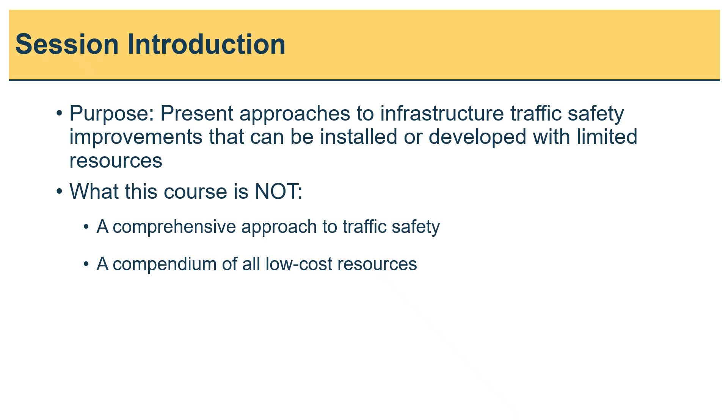Note that this training is geared towards actions that can be implemented with in-house staff and limited resources, and is not a comprehensive approach to traffic safety. The approaches presented here are a selection of low-cost countermeasures and best practices, though there are many other options agencies may consider as they work towards zero deaths.

This session will begin by defining what constitutes effective low-cost infrastructural approaches to traffic safety and explaining the purpose and benefits. Several examples of low-cost infrastructure countermeasures will be explored, including signage and pavement marking strategies, various speed management techniques, intersection visibility improvements, and different types of quick build and demonstration projects.

Low-cost countermeasures are countermeasures or implementation approaches that are designed to be affordable, scalable, and effective in addressing common roadway safety concerns without requiring major infrastructure changes. The intention of these strategies are to improve traffic safety by utilizing in-house staff, do not require engineering design, and utilize materials typically on hand for public works departments or can be obtained with minimal costs.

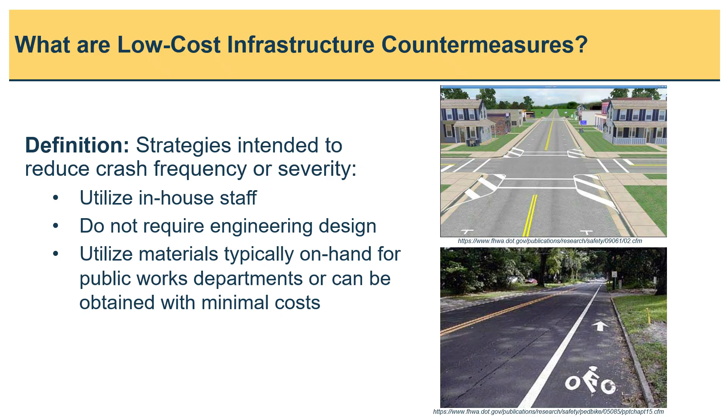Since maintenance departments typically have materials such as paint available, countermeasures such as applying pavement markings, like the curb extensions with crosswalks and the bike lane examples on this slide, are typically considered low cost and easily installed. In this first section, we will go into more depth on general pavement markings, with examples, location suggestions, and implementation guidelines.

Pavement markings are a versatile way to relay messages to all road users. Reflective or high visibility paint or tape is applied to the roadway surface to regulate traffic and to alert drivers of upcoming hazards or conditions, such as intersections, schools, pedestrian crossings, or horizontal curves.

Examples of pavement markings can include installing center or edge lines, or widening the edge lines from 4 inches to 6 inches where already present. Installing high visibility crosswalks is another pavement application that can be installed at any intersection where there is significant pedestrian traffic, which can be supplemented with advanced pavement warning messages or signage.

The location examples listed here are only a few suggestions on where to consider installing pavement markings to increase safety for all road users, including intersections, pedestrian crossings, bike facilities, school zones, curves, roundabouts, and highways.

In addition to these specific examples, determine if it is possible to apply the pavement markings systemically, meaning that they can be applied to a network of roads or intersections that meet certain criteria, not necessarily dependent on crash history or specific areas of concern. Another suggestion would be to identify opportunities to incorporate striping into other projects, like painting center or edge lines on a road that previously did not have them during a repaving cycle, or upgrading to a high visibility thermoplastic.

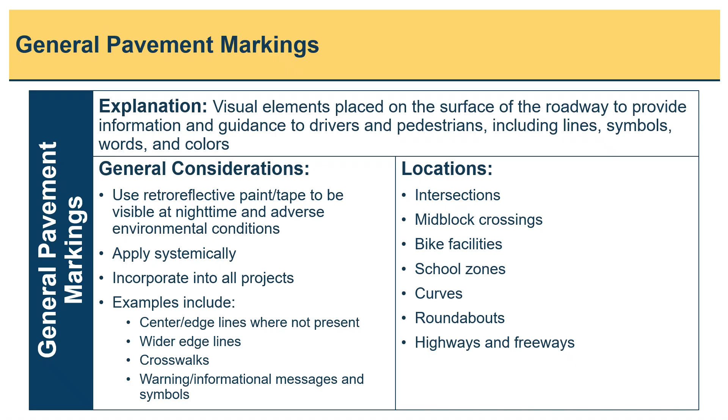Consult the Local Road Safety Plan and appendices for location recommendations specific to your county, including a systemic network of locations based on roadway attributes where certain pavement markings may be more effective.

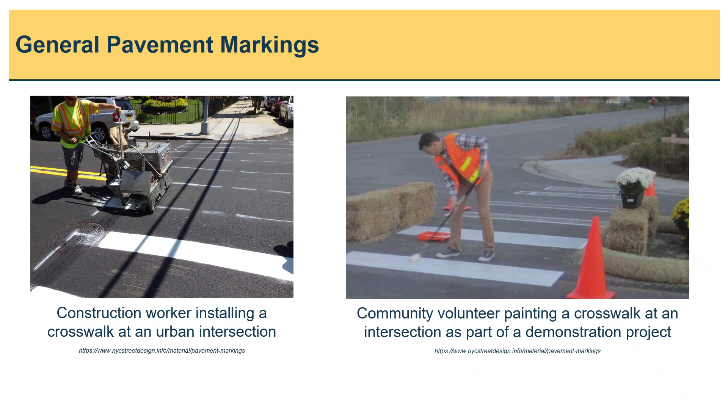Pavement markings shape how streets are used, whether applied by professionals or created through community collaboration with demonstration projects. Trained crews use specialized equipment for precise, durable installations, while volunteers can also apply temporary markings with paint or tape. Borrowing equipment and expertise from other agencies or counties can also help to keep the cost low.

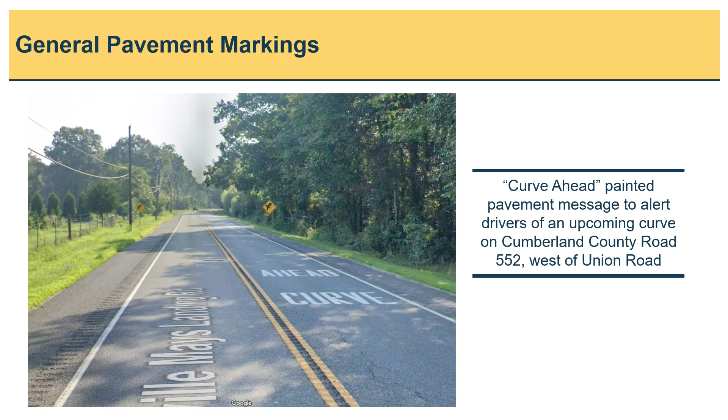An important part of general pavement markings are stencils. Borrowing stencils can make street improvements more accessible, allowing communities to create clear, consistent markings without needing expensive tools. It's a simple way to share resources, spark local engagement, and ensure traffic messages are easy to read and widely understood. The example shown here illustrates a curve ahead pavement message to alert drivers of an upcoming curve in the road on Cumberland County Road 552.

This next section will highlight some examples of low cost and easily implementable speed management strategies.

Installing optical speed bars, or speed reduction markings, is a speed management technique that encourages drivers to reduce their speed with the use of pavement markings. The markings are composed of a pattern of transverse dashes perpendicular to the lane lines, designed to create an illusion that a vehicle is accelerating by spacing the dashes closer together in the direction a vehicle is traveling.

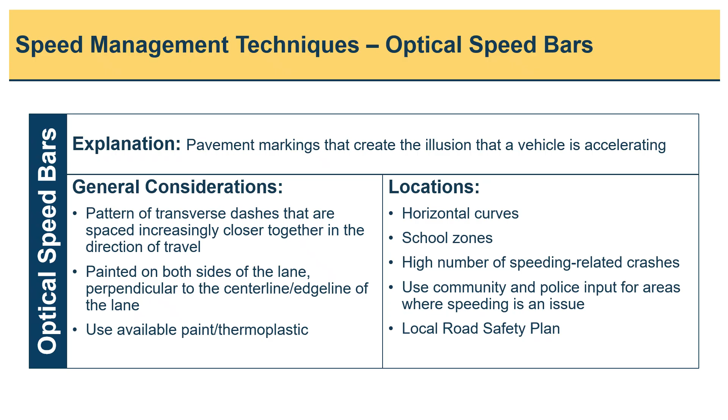Consider implementing optical speed bars in advance of horizontal curves, in school zones, locations that have a high number of speeding-related crashes, locations identified through a crash data query tool, or locations identified by the community or local law enforcement personnel where speeding is a concern. Also consult the local road safety plan and appendices for more guidance on places where speeding-related crashes may be an issue.

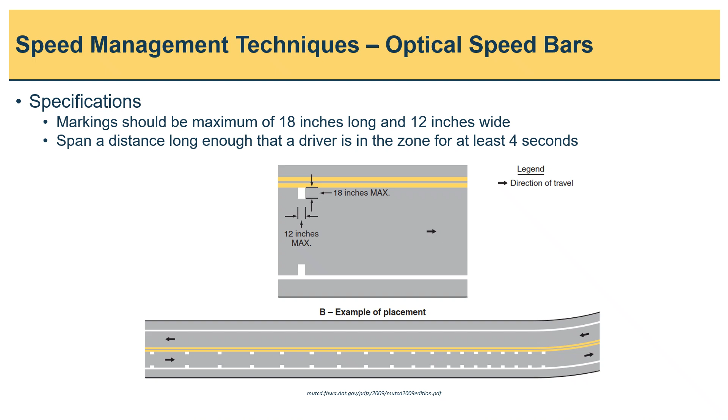Optical speed bars are painted on both sides of an individual lane, perpendicular to the center or edge lines. Markings should not exceed 18 inches long and 12 inches wide. The marking should span a total roadway distance long enough that a driver is in the optical speed bar zone for at least 4 seconds, as recommended by the Federal Highway Administration. The bottom image demonstrates the placement of optical speed bars ahead of a curve.

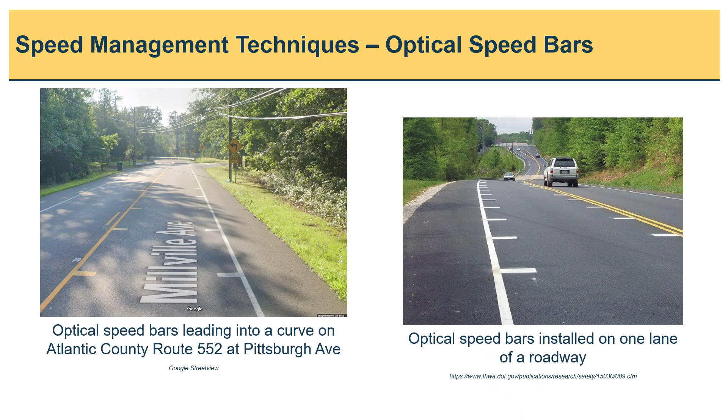Once the optical speed bars are installed, a plan to evaluate their performance should be developed, which may include an analysis of crashes before and after implementation, a comparison of the need for enforcement or citations issued, or the completion of a speed study. Progress updates should be noted quarterly on the local road safety plan website at saferoadsouthjersey.com.

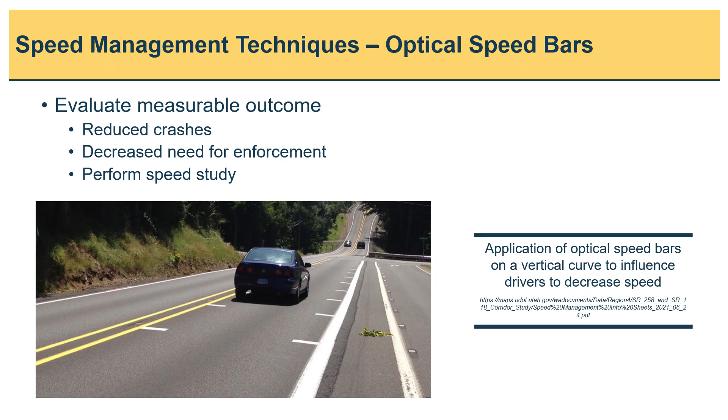Lane narrowing is another type of speed management technique. This countermeasure decreases the lane width of a roadway to influence drivers to slow down. Although a roadway lane typically measures 12 feet in New Jersey, the New Jersey Roadway Design Manual recommends decreasing the width to 10 or 11 feet for the purpose of traffic calming, though this will depend on your specific roadway conditions and environment.

Prioritize locations that have a high number of speeding-related crashes, identified using a crash query tool or local safety plans, or consult with the community or enforcement agencies for input on areas where speeding is an ongoing issue. Ensure that you're also considering roadway attributes when considering locations.

Narrowing lanes can have a detrimental impact on roads with high traffic volume or truck traffic. Consider the land use and whether the roadway is in an urban or rural area and the impact a narrower lane will have. Also take into account the pedestrian and bicycle traffic, as narrowing a lane can decrease speeding ahead of crosswalks but also create enough room on the side of the road to install a bike lane.

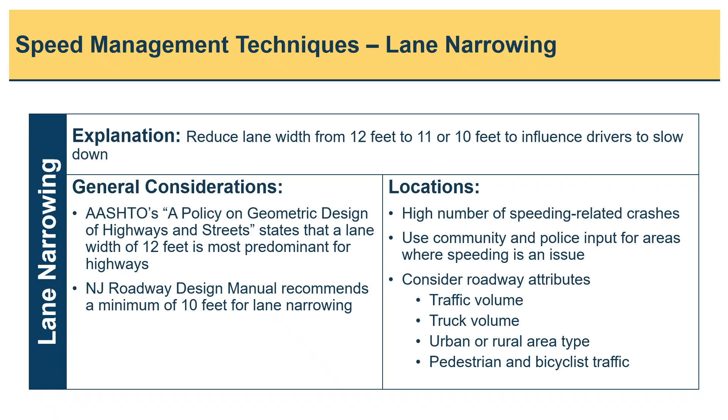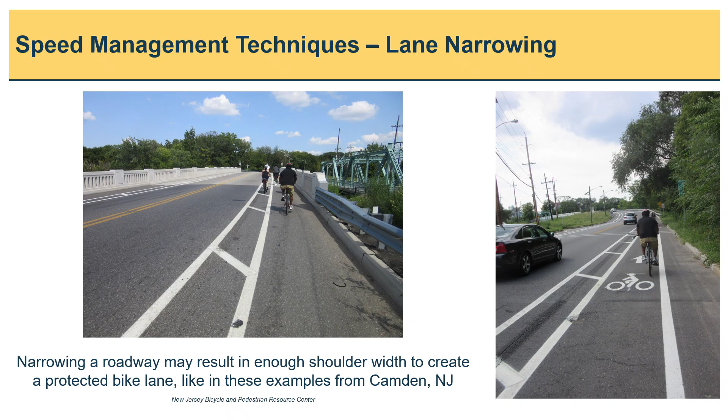One result of narrowing a lane or roadway is an increase in shoulder width. While the shoulders can be left as is to increase the clear zone, they can also be converted to a bike lane if the width and roadway characteristics meet the design standards and criteria, like this local example in Camden, New Jersey. Consult Complete Streets or the Roadway Design Manual for recommendations to help get you started.

When prioritizing locations that would make good candidates for lane narrowing, it is recommended to first consider locations that have a high number of speed-related crashes identified using a crash data query tool or be identified by the community or local law enforcement personnel where speeding is a concern. Also consider roadway attributes to narrow down the possible locations, such as area type, traffic volume, truck traffic, and pedestrian and bicyclist volume.

Before new edgelines can be painted, the existing ones must first be removed and the roadway resurfaced or microsurfaced as necessary. Once installed, a plan to evaluate the performance should be developed, which may include a measured reduction in crashes, a decreased need for enforcement, or the completion of a speed study.

Narrowing lanes may provide an option to add a separated bicycle lane or create wider or paved shoulders on one or both sides of the road. Another strategy is to supplement this with striping in the shoulder, shown in this example.

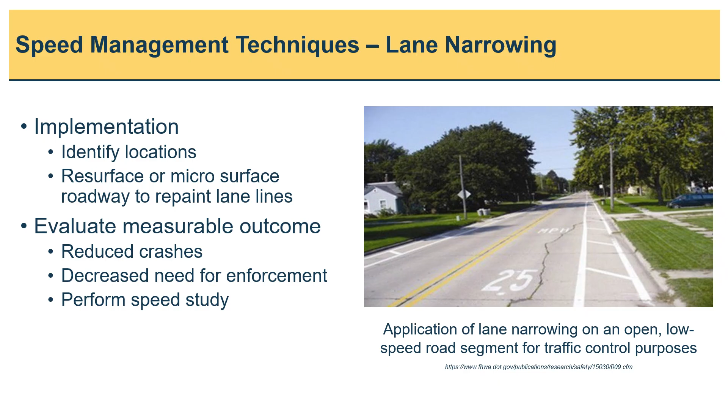Vehicle or dynamic speed feedback signs are electronic signs that alert drivers of their speed using radar. The speed is detected and then shown on an LED display. If a vehicle is exceeding the targeted speed, their speed will flash or display the text 'slow down' or other message to indicate speeding. Variations of this device can be portable or permanent, or solar powered so they do not require electricity or additional power hookup. This is especially beneficial in rural areas where a power source may not be available.

Choose locations to display speed feedback signs based on where speeding is a concern or has the potential to be an issue.

This may include locations with a high number of speeding-related crashes, identified using a crash data query tool or pre-existing transportation plans, locations identified by the community or local law enforcement personnel where speeding occurs, in advance of horizontal curves, school zones, work zones, or in residential neighborhoods.

If using a portable version, consider relocating the sign frequently to different locations to maintain the novelty of the device.

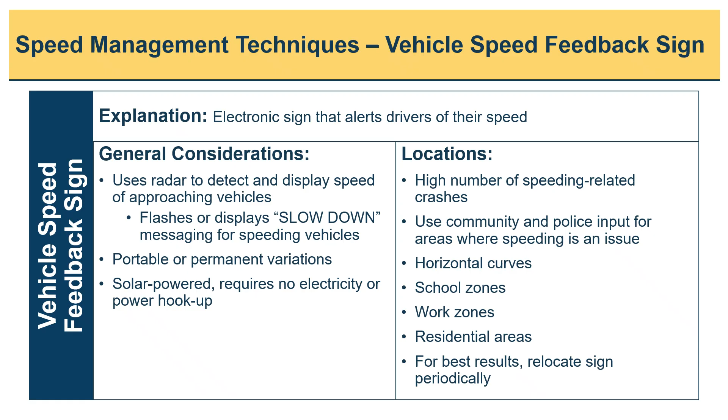While there are many different models of a vehicle speed feedback sign, the overall idea is to alert the driver of their speed compared to the posted speed limit and encourage the driver to slow down.

Different options for the feedback sign can be a flashing speed if they are over the speed limit, or a customized message. Portable speed feedback trailers, like in these examples, are a great option since they can frequently be relocated to different areas of concern.

When setting up a portable speed feedback trailer, ensure that the device is not placed in the potential path of pedestrians, bicyclists, or emergency vehicles. One good option would be placing it in the grass or open area so it is not in the roadway or blocking the shoulder.

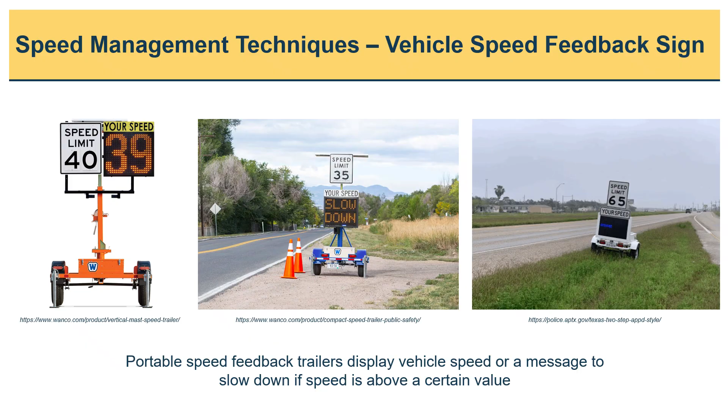It is worth noting that some models of speed feedback signs have the capability to collect and store speed and traffic volume data, which can then be downloaded and utilized for alternate traffic analysis, enforcement planning, or infrastructure improvement strategies.

Once installed, a plan to evaluate the performance should be developed at each separate location that a speed feedback sign is posted, to determine its efficacy or need for other speed mitigation strategies. This can be measured by reviewing any crashes that occurred while the feedback sign was posted, comparing traffic stops or citations, or the completion of a speed study.

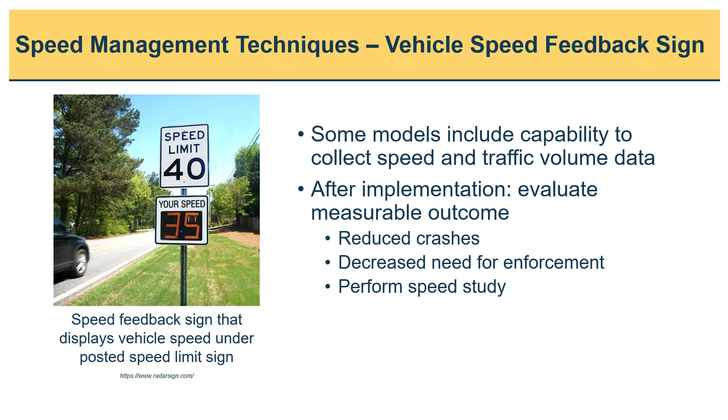The next countermeasure we'll discuss is daylighting intersections.

Daylighting intersections is a general term that includes any method of improving sight distance at an intersection approach. This includes removing visual obstructions or improving the visual field of view, which also promotes pedestrian and bicyclist safety.

Taking land use into account when selecting locations, such as whether an intersection is in a rural or urban setting, can help prioritize sites that will benefit most from daylighting.

Clearing vegetation, overgrowth, and other obstacles is especially impactful at rural intersections where speeds may be higher and drivers have less time to react for vehicles turning from a side road. We strongly recommend implementing this systemically along any high-volume rural roadway.

Alternatively, daylighting at urban intersections may focus more on pedestrian safety, such as adding in curb extensions or prohibiting parking near the intersection by using materials such as poles, pavement markings, or planters.

This can also be implemented systemically along urban corridors to adopt a proactive approach to safety, to supplement application at intersections where crashes have already occurred.

Intersections that are a good candidate for daylighting can be identified by executing a crash data query with a program such as Numetric, by identifying urban intersections with pedestrian or bicycle traffic, or by consulting community representatives.

There are also resources through SJTPO's safety planning website with links to lists of intersections that have already been analyzed as part of a network screening analysis, including a list that represents pedestrian and bicycle crashes at intersections for each county. The county local road safety plan also contains a systemic analysis to aid in implementing across a broader network.

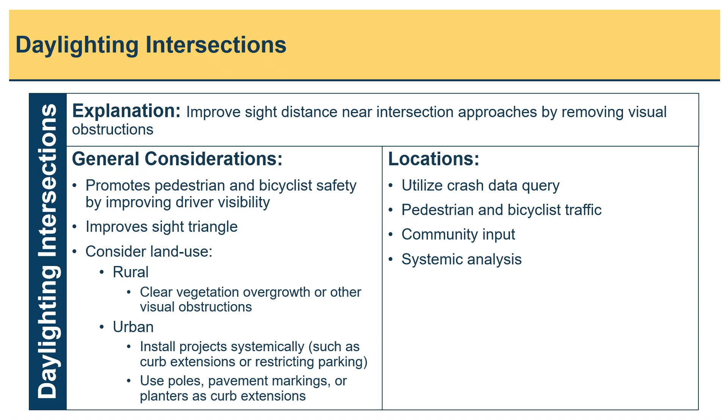The concept behind intersection daylighting is opening up the visibility or sight triangles approaching the intersection. In an urban environment, this can include prohibiting parking and installing curb bump outs to decrease blind spots and increase visibility, especially of pedestrians crossing the road.

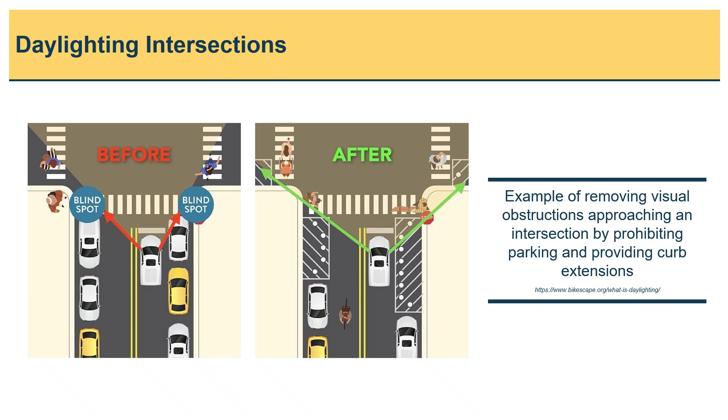In a rural area, clearing vegetation and other obstacles opens up the intersection approaches, making it easier for drivers to slow down for vehicles that enter from an intersection onto the major road. Intersections adjacent to curves should also be identified as priority locations, as visibility can be exceptionally poor.

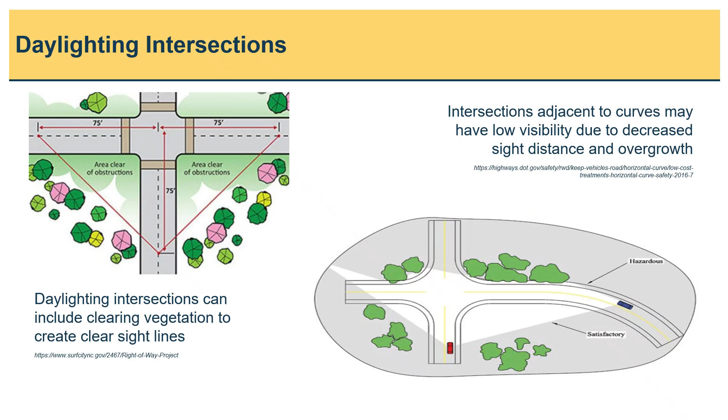To select a strategy to implement, consider the resources and budget. Many of the ways to implement daylighting at intersections can be low cost and use materials that are already in-house, can be borrowed, or be purchased at a low price.

Partner with local businesses, stakeholders, engineers, and planners to determine feasibility. In urban areas where several locations are in close proximity to each other, consider installing systemically to maximize resources.

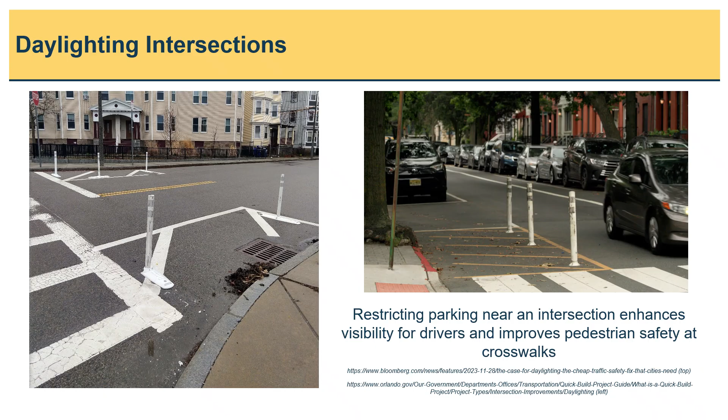Once installed and results are evaluated, consider alternate methods to improve the outcome, or consider a more permanent or upgraded fixture if the project is successful.

In the final section of this training, we will focus on quick build and demonstration projects with examples, implementation strategies, best practices, and location suggestions.

Quick build and demonstration projects are small-scale, non-permanent fixtures or strategies that can be implemented in a much shorter time frame than full build improvements. Because of the materials and construction techniques used, these projects can be a bridge to a permanent project or be used to pilot a project before broader implementation.

Since these projects are intended to be short-term, temporary, and reversible, this provides the opportunity to see potential results and receive community feedback before a more permanent solution is installed, keeping the initial project relatively low cost. Projects can be varying degrees of level of effort, depending on the resources and funds available.

Quick build and demonstration projects are also a key element in advancing the Complete Streets initiative, which incorporates safety of all road users and modes of transportation in designing a roadway.

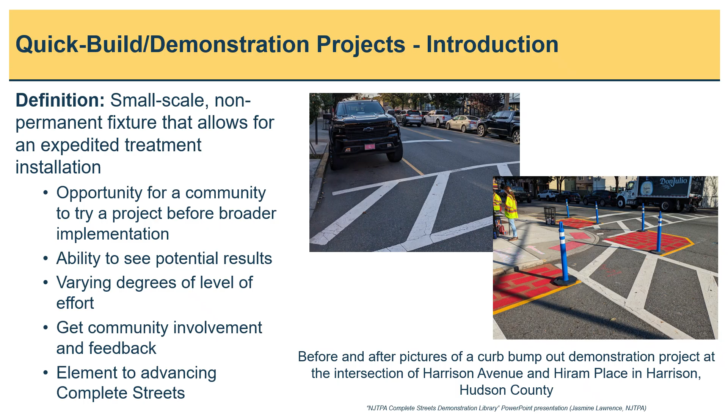There is a technical assistance program available to provide support for municipalities in the SJTPO region, which we will detail later in this presentation. There are several quick build and demonstration projects that have already been implemented in New Jersey, including this curb bump out at the Harrison Avenue and Hiram Place intersection in the town of Harrison in Hudson County. This slide shows a short list of common examples of quick build or demonstration projects.

These can include constructing a protected bicycle lane using paint, delineators, or barriers. In areas with high pedestrian activity, different variations of curb extensions can be installed to prohibit parking, improve intersection visibility, and to shorten the crossing distance for pedestrians.

These can be accompanied by the addition of crosswalks or mid-block crossings, or improving the visibility of existing crosswalks, providing the opportunity to enlist local artists and community input.

A quick word of caution when installing asphalt art for installations of curb extensions and crosswalks: make sure that it does not interact with or adversely impact official traffic control devices, such as other striping, or is distracting or confusing for road users.

A pedestrian refuge island can be incorporated into crosswalks to also decrease the number of lanes a pedestrian has to cross. Prohibiting or changing parking, whether it's moving a parking zone or prohibiting it near curb extensions, can be a good way to see how the community reacts while influencing safety.

Roundabouts are a good candidate for a quick build project to also gauge public interest and feedback at high-risk intersections and to measure the potential success of a permanent one. Many of these techniques can also be used as a form of traffic calming where speeding is an issue.

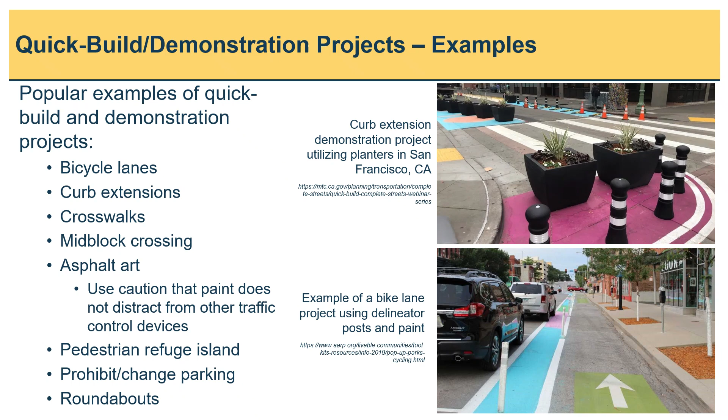One of the benefits of these types of projects is that the materials are typically low cost or already supplied in-house. Some materials, such as pavement stencils, can be borrowed from neighboring cities or counties, while others may be donated, especially if enlisting the help of local artists or businesses that may be able to provide their own paint or planters.

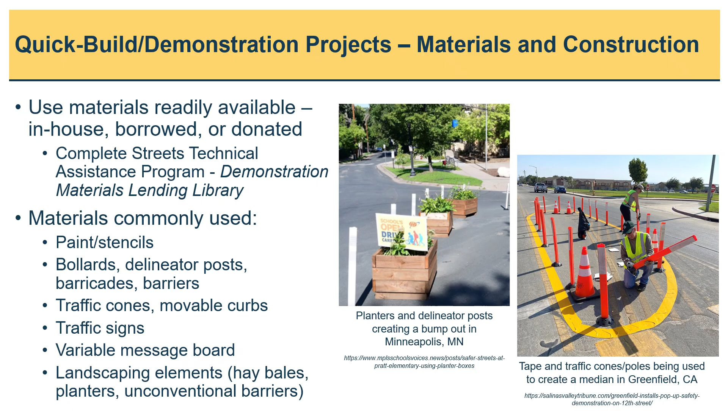The Complete Streets Technical Assistance Program is creating a lending library of materials available to municipalities of SJTPO through their application process. Commonly used materials include paint and stencils, bollards, delineator posts, barricades and barriers, traffic cones, movable curbs, traffic signs, and elements of landscape design such as hay bales, planters, or other types of unconventional barriers.

All of these materials used in these projects are low cost or available through a lending library and are important elements in maximizing the effectiveness of this project. They allow for quick installation and easy adjustments, making them ideal for evaluating the effectiveness of design interventions in real-world conditions.

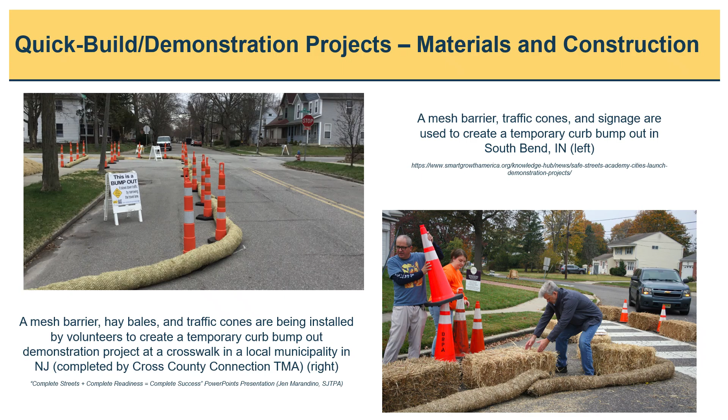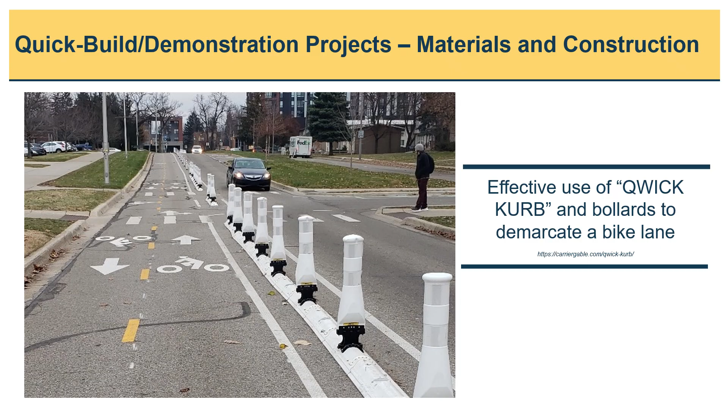Bicycle lanes can be installed on the side of the road by limiting street parking, narrowing lanes, or using the shoulder. Bike lanes must be separated and protected from adjacent vehicles, which can be achieved by adding materials that provide both a physical barrier and vertical element.

Commonly used materials include a combination of paint or tape, bollards or delineator posts, traffic cones, planters, or any other fixture that defines the separation of lanes.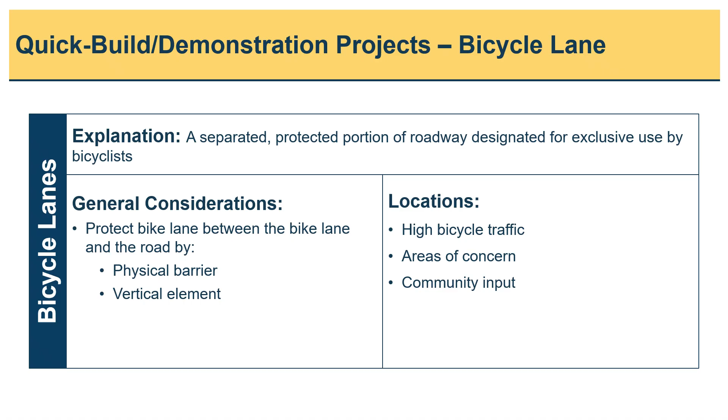Identify locations where a bike lane would be most useful, where there is high bicycle traffic, related crashes, or consult the public on where they would ride a bike if there were proper infrastructure. This can be done using a survey, social media, or by talking to local residents or businesses.

Along corridors with high bicycle traffic, protected bike lanes can be delineated using physical barriers such as planters and bollards to separate cyclists from vehicle traffic. These treatments enhance rider safety, improve visibility, and encourage multimodal transportation.

Informational signage and QR codes may be deployed to educate the public and gather feedback during demonstration projects.

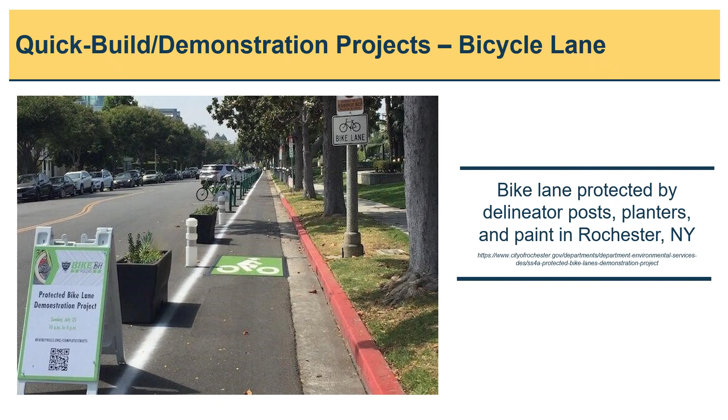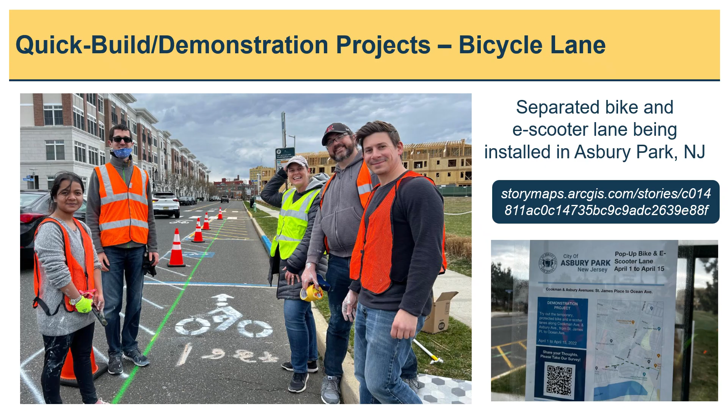Mid-block crossings are crosswalks that provide a dedicated space for pedestrians to cross a road where there are no intersections or on a stretch of road that does not have close adjacent intersections.

When installing a mid-block crossing, supplement the crosswalk with appropriate signage and pavement markings. Also consider constructing curb extensions or bump outs to improve driver visibility of pedestrians and as a form of traffic calming. There are several ways to narrow down potential mid-block crossing locations.

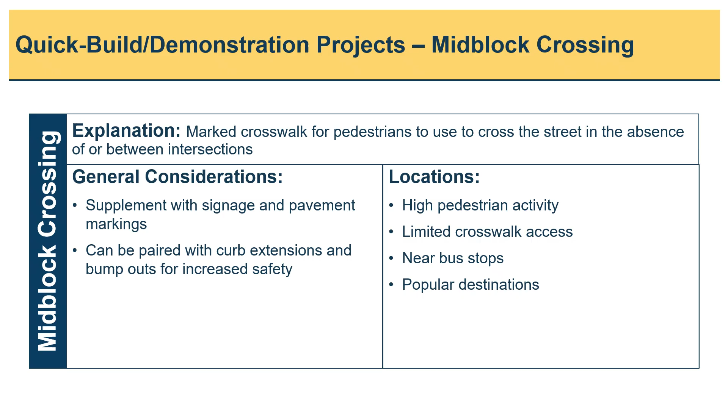Look for areas that have high pedestrian activity already present, no convenient crosswalks or places where pedestrians naturally cross the road without a crossing, and near popular destinations or bus stops.

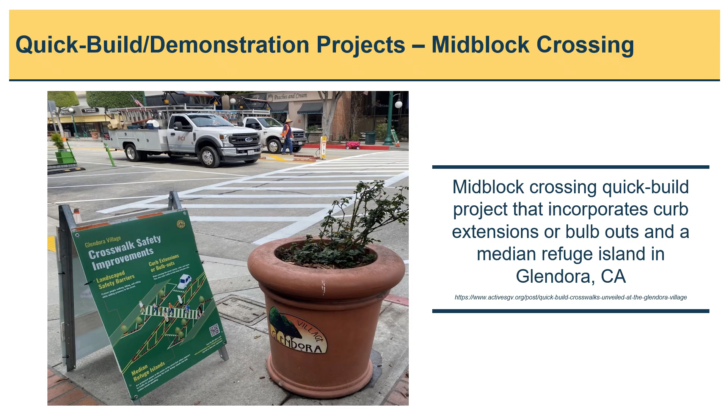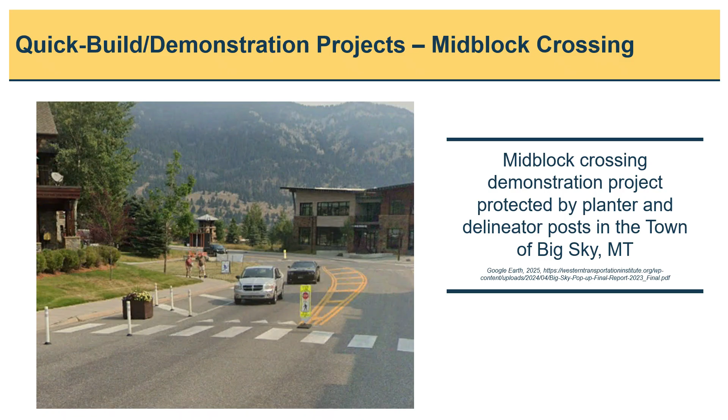This mid-block crossing was installed in the town of Big Sky in Montana as a traffic calming measure to visually signal drivers to slow down and be alert to pedestrian activity. Curb extensions were also installed for an extra layer of safety, as well as plastic bollards and a planter to improve driver visibility of pedestrians.

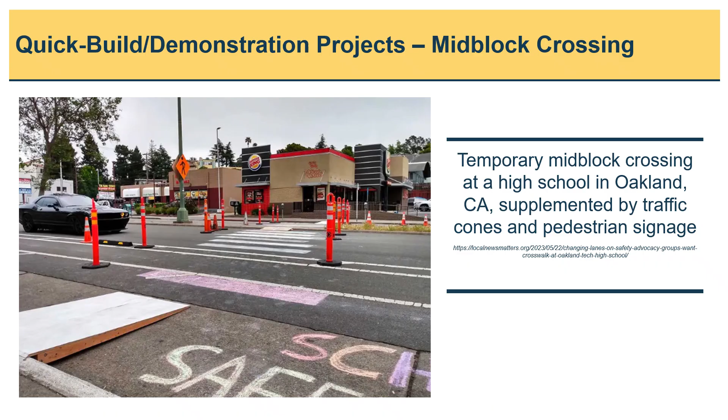Pedestrian refuge islands often complement mid-block crossings to improve safety and accessibility for vulnerable road users. A refuge island is a break in the median that gives pedestrians a safe area after they cross one direction of traffic while they wait for a break in traffic from the other direction before continuing to cross the remainder of the crosswalk.

This decreases the number of lanes a pedestrian must cross at one time and allows them to focus on only one direction of travel at a time. The recommended width of the refuge island is 4 to 8 feet to accommodate all users, such as groups of pedestrians, wheelchairs, strollers, and bicycles. When developing, ensure that there is adequate barriers and reflective markers.

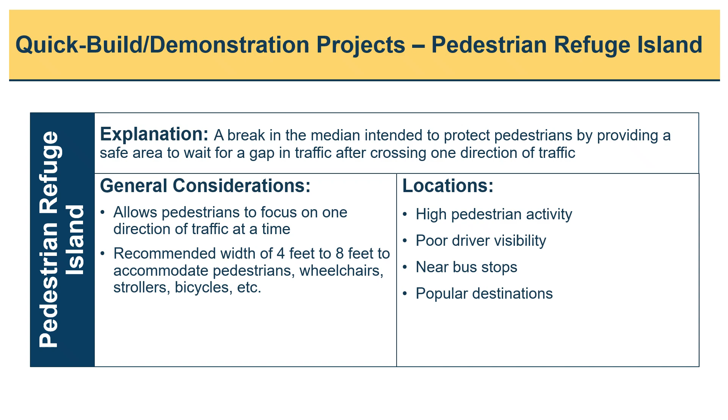This project in Madison, Minnesota features a mid-block crossing with the addition of a pedestrian refuge island protected by yellow and black bollards. This refuge island allows pedestrians to cross in 2 stages, focusing on one direction of traffic at a time, which is especially beneficial on wider or busier roads.

The combination of high visibility markings and physical barriers create a break for pedestrians and reinforces driver awareness.

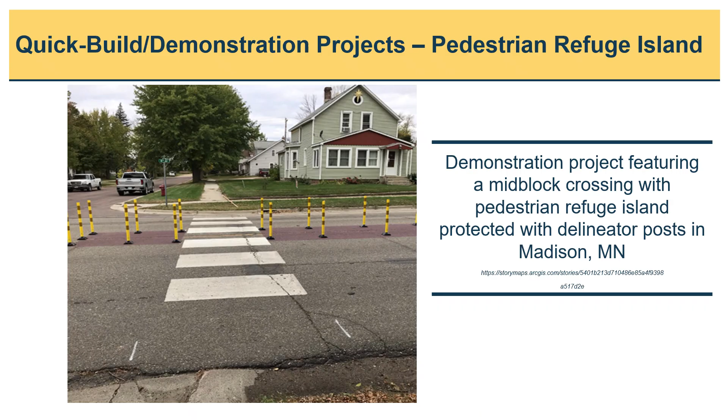This residential crosswalk in Seattle, Washington used a brick overlay with yellow bollards to designate the median refuge island.

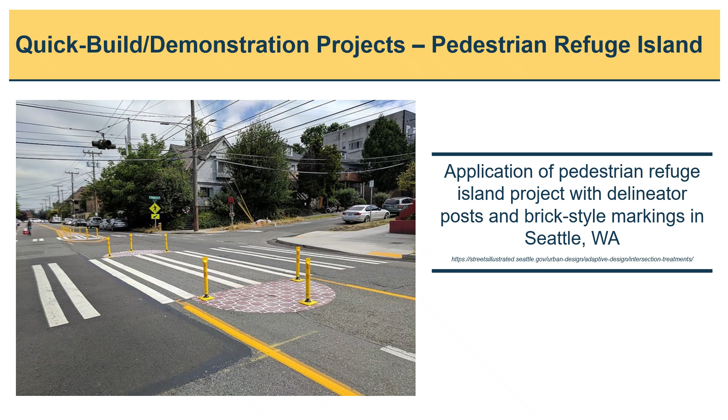A quick-build project in Omaha, Nebraska received funding to install temporary modular pedestrian refuge islands with the intention for them to eventually become permanent infrastructure. These mats are made up of interlocking pieces of rubber composite that can be put together in different configurations. Note the presence of different types of signage used, including pedestrian crossing indicators, directional arrows, and an informational poster.

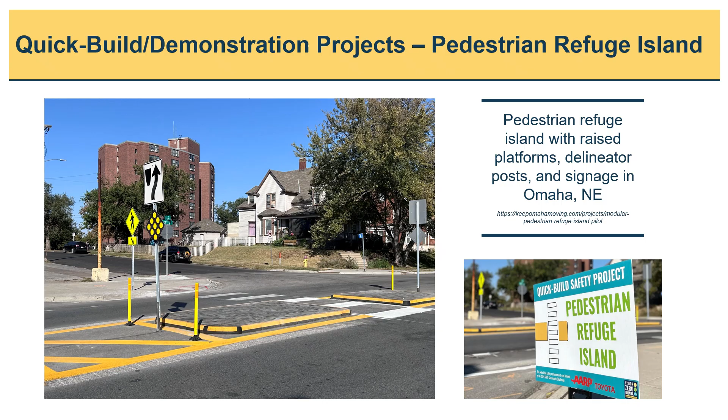Extending the curb line is another example of a quick build or demonstration project. This entails physically narrowing a roadway by expanding the curb line to help reduce pedestrian crossing distance, improve pedestrian visibility, improve intersection visibility, reduce vehicle speeds, and reduce corner radii at intersections to reduce turning speeds. Curb extensions are ideal at locations with high pedestrian traffic or where traffic calming is needed. There are three main approaches to curb extensions, including mid-block curb extensions, bump outs or bulb outs at intersections, and radius reduction at intersections.

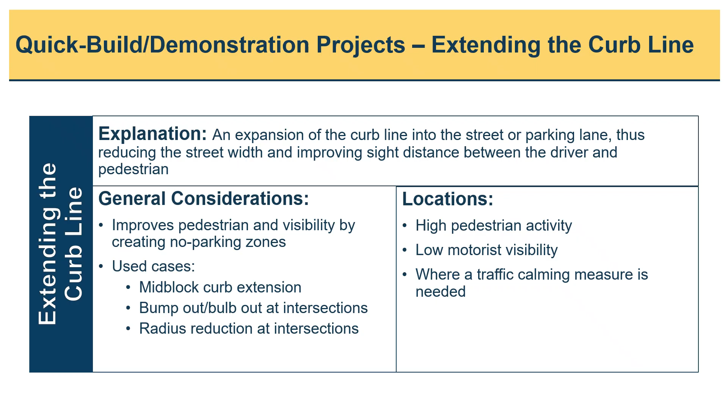This intersection in Tucson, Arizona features painted curb extensions with physical barriers, planters and bollards, that extend the curb line, creating corner bulb outs that reduce turning speeds, restrict parking at the intersection approaches, and shorten pedestrian crossing distances. These combined elements offer a cost-effective way to calm traffic and improve visibility at urban intersections.

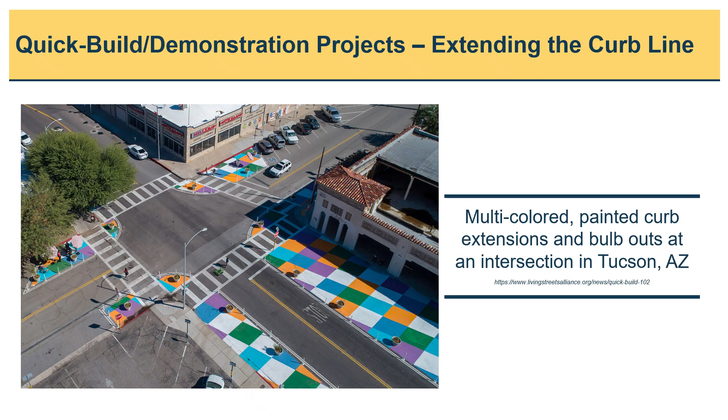While this intersection uses a unique painted mural to create curb extensions, use caution when painting the pavement to ensure it is not distracting to drivers or impacting other traffic control devices or pavement markings. This is an example of a painted bulb out that has white delineator posts and vibrant surface markings, creating a highly visible and protected pedestrian zone at an intersection corner.

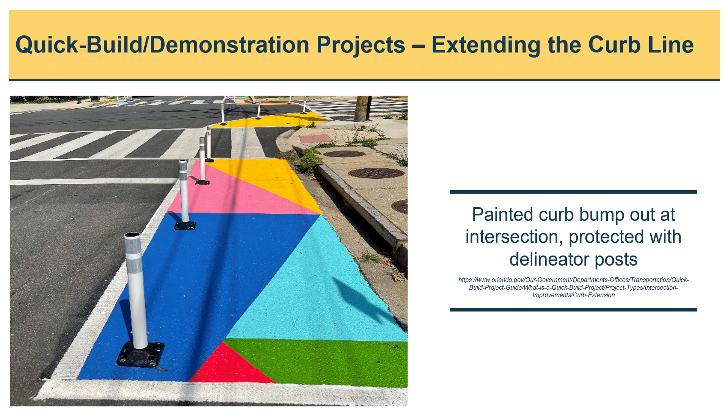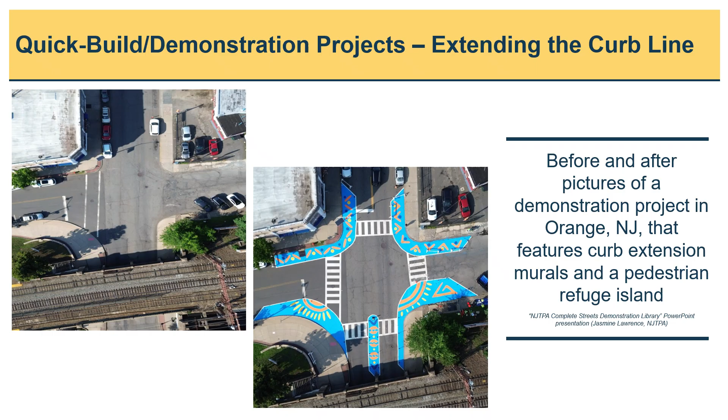Mid-block curb extensions are installed with mid-block crossings. Similar to bump outs or bulb outs, these curb extensions jut out into the road at crosswalks to shorten the crossing distance for pedestrians. Similarly, they also improve driver visibility when approaching a mid-block crossing.

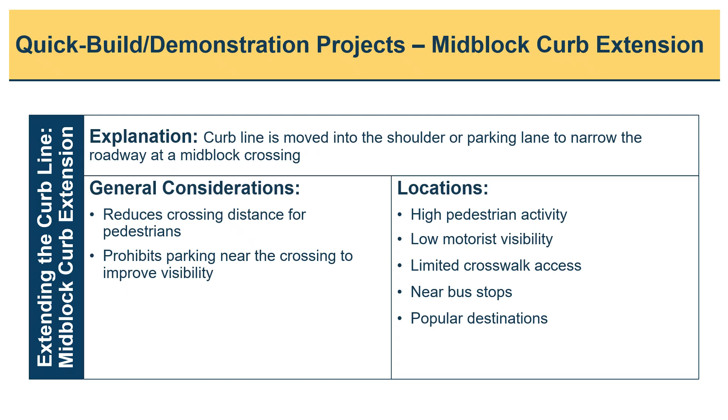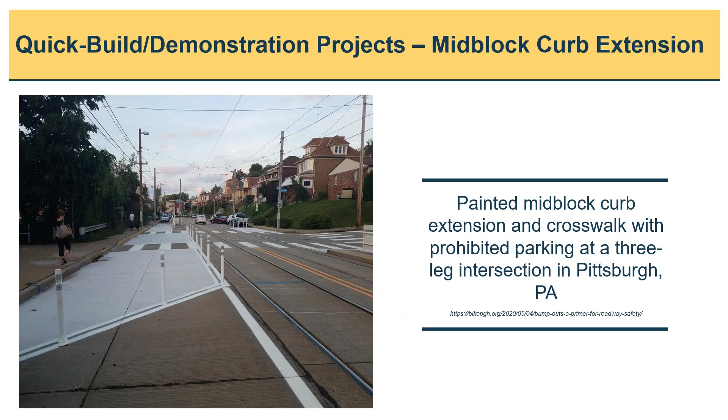This mid-block curb extension in Pittsburgh, Pennsylvania, allows pedestrians to safely cross from one side of the road to the other at the crosswalks. Although the crosswalks are at a three-leg intersection, they are still considered mid-block crossings since the major leg is uncontrolled. This particular crossing was positioned near a trolley stop and has future designs for a permanent installation. Note that the street parking in the area of the mid-block curb extension is now prohibited.

Mid-block curb extensions painted with bold patterns and vivid colors capture a driver's attention and draw their eyes to pedestrians that may be crossing.

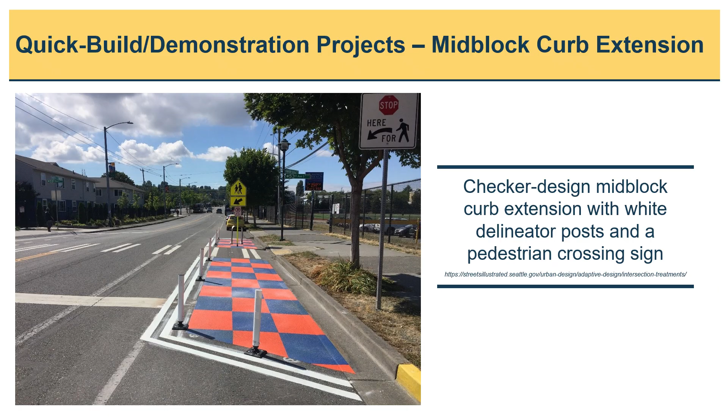In this local example, a mid-block curb extension was painted along Route 49 in Salem City in Salem County. Although this crossing is at a three-leg intersection, the main leg has no traffic control. Note that the curb extension prohibits parking leading up to the mid-block crosswalk to make it easier for vehicles to see pedestrians since they will not be obstructed by parked vehicles.

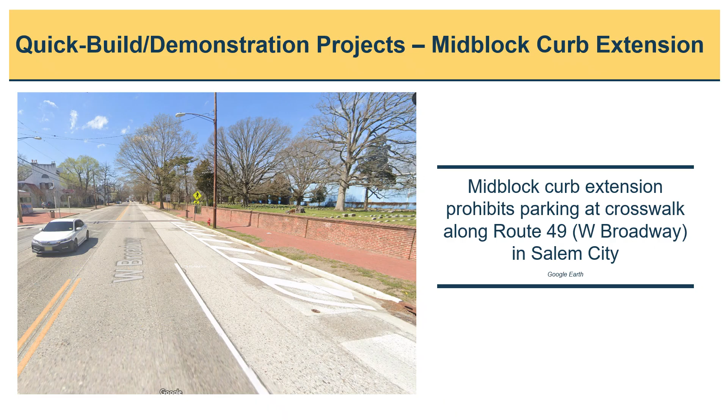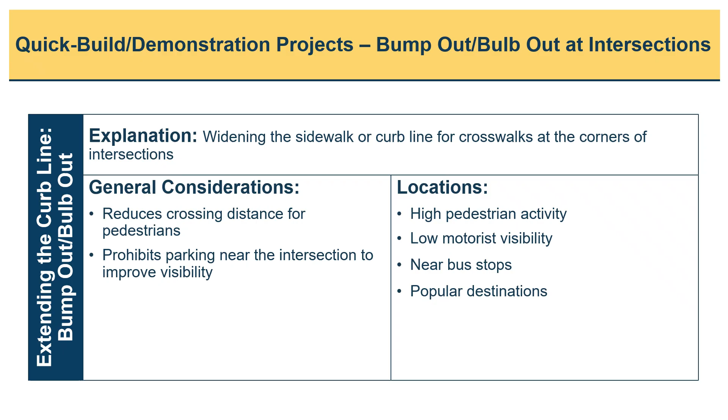At intersections with high pedestrian activity, bump outs or bulb outs are an effective strategy to prohibit parking, improve intersection visibility, and to shorten the pedestrian crossing distance. These extensions may be limited to one approach to an intersection or continue through the curb radius to the cross street approach as well. Consider locations with high pedestrian activity, low motorist visibility, and locations that are near transit stops or popular destinations.

This curb bump out in Chicago, Illinois features vibrant colors to grab the attention of drivers and to reiterate that this area is not for vehicular traffic or parking. The pole delineators act as a physical vertical separation between the vehicles and pedestrians that are standing in the bump out area.

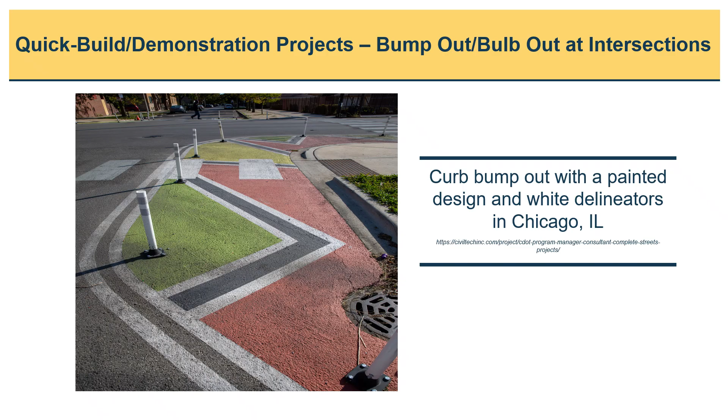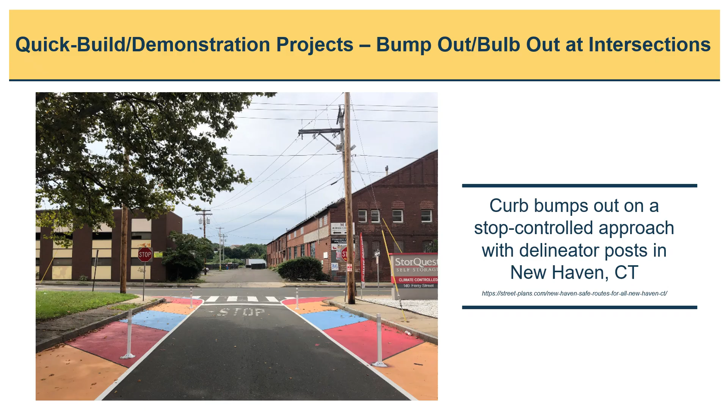Similar to the bump outs in Chicago, this urban intersection in New Haven, Connecticut also uses bright colors to draw the attention of drivers to pedestrians and to visually narrow the roadway. White bollards reinforce the physical separation between vehicles and pedestrian space, while dual stop signs and pavement markings emphasize driver awareness and compliance at the crossing.

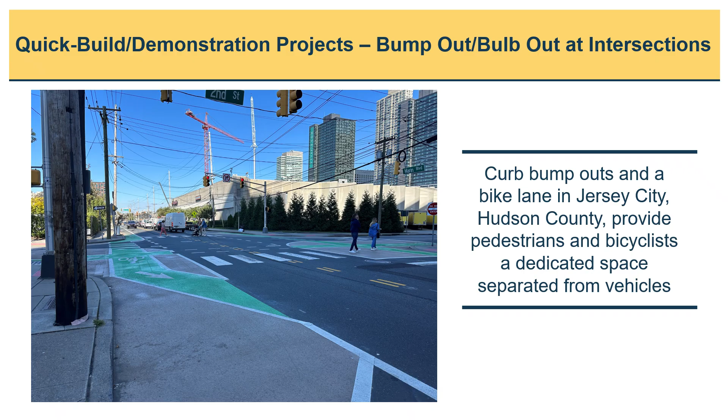This picture taken in Jersey City displays both a curb bump out and a bike lane, providing both pedestrians and bicyclists a dedicated area that's separated from vehicular traffic. These projects were created using pavement paint, which is a low-cost way to make a significant impact.

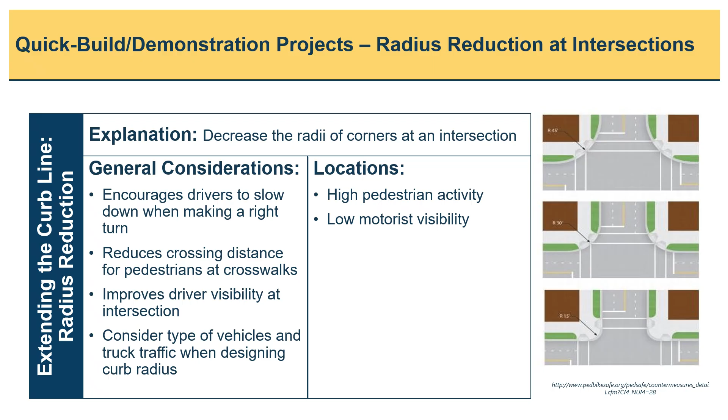Decreasing the radius at the corners of intersections is a design approach that increases visibility and encourages traffic calming. It encourages drivers to slow down when making a right turn and improves safety for pedestrians by reducing the crossing distance and opening up sight triangles approaching the intersection. Consider locations with high pedestrian activity and low driver visibility. Ensure that the type of vehicle and truck traffic is also considered when redesigning the curb radius.

Roundabouts may seem like an unlikely candidate for a quick build project, but can actually help gauge public feedback and measure potential success of a permanent roundabout. Temporary roundabouts should be considered at low-volume, unsignalized intersections that have a history of traffic congestion or high-severity crashes.

A roundabout consists of a central island, where entering traffic slows down and yields to vehicles already inside. This eliminates the left turn movement. Because the traffic control is changing, signage and delineation of the roundabout should clearly communicate the change to approaching drivers, as well as how drivers should navigate the intersection. Supplemental signing and pavement markings should be considered. Also consider the type of vehicles using the intersection to ensure that truck traffic will still be able to safely navigate.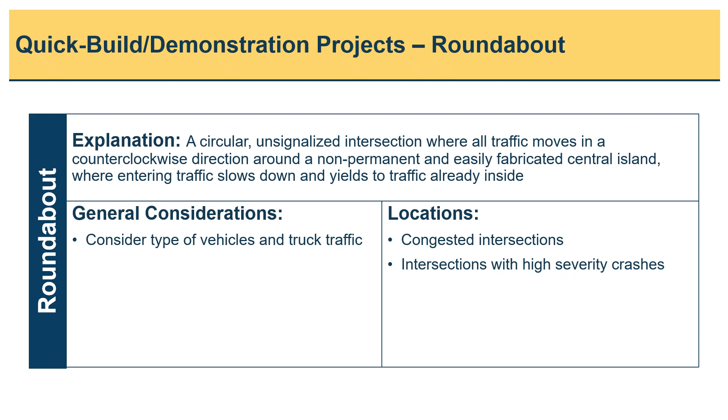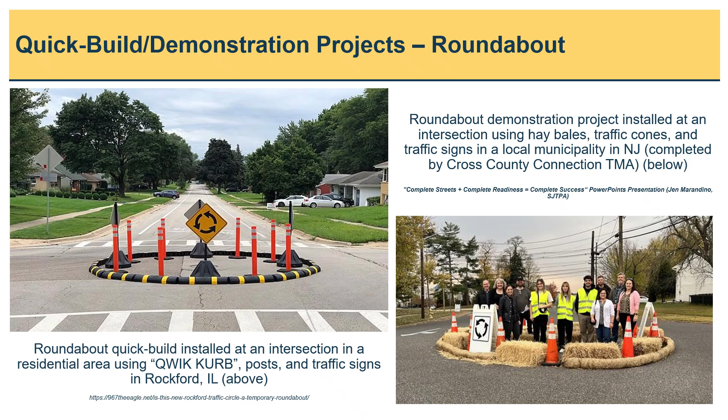The image on the left shows a quick-build roundabout in a residential neighborhood in Illinois. It used low-cost materials like flexible orange and black bollards and standard signage to define the circular traffic pattern. Its modular design allows for rapid installation and easy adjustments, which provides an effective interim solution for calming traffic and improving intersection safety. The demonstration project in the image on the right was installed with help from Cross-County Connection Transportation Management Association and a local New Jersey municipality using hay bales, traffic cones, and A-frame signage, indicating how to navigate the roundabout. Both roundabout examples on this slide guide drivers through the intersection while minimizing construction disruption, keeping costs low, and providing the opportunity to evaluate public feedback and safety effectiveness before investing in a permanent option.

The full process of implementing a quick build or demonstration project includes first identifying potential locations. The local road safety plans are a great resource to reference for lists of prioritized roadway segments, intersections, high-risk rural roads, and pedestrian and bicycle locations specific to your county. The appendix of each LRSP also summarizes roadway characteristics to target crash types of concern. Other methods of identifying locations may include focusing on locations with high pedestrian or bicycle traffic or garnering public input.

The next step is to determine the type of project for each location and the materials needed, then how to procure the materials. Depending on the proximity of the locations, the type of project, or the required materials, consider implementing systemically. To measure the success of the project, develop a plan to measure performance, such as the number of crashes or public feedback. If a project is deemed successful, consider transitioning the temporary fixtures into a permanent installation. This could be upgrading the materials used, replacing the materials with concrete, or including repainting during annual maintenance.

As with any type of safety project, consider any liability factors and adhere to local, state, and MUTCD regulations and guidelines. All project plans should be approved by both the engineer and transportation facility owner, whether it's a private property owner or government body, regardless of the guidance given by Cross-County Connection or SJTPO, and documented as a letter to SJTPO.

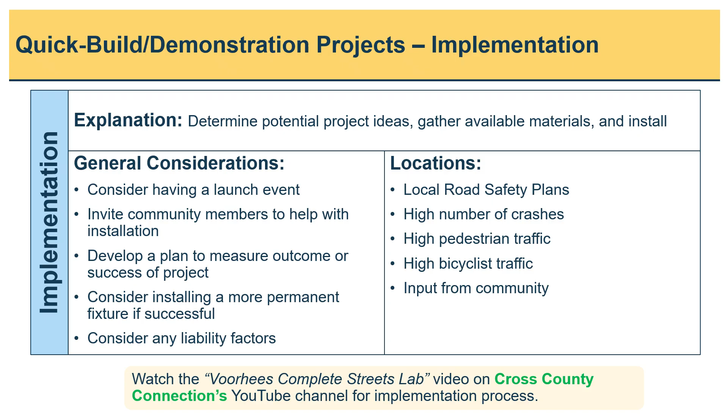Maintenance workers will be able to install pavement markings and tape for many of these projects. Due to the temporariness of quick build and demonstration projects, you can make the decision to remove the pavement markings at the end of the project or make it permanent by frequently repainting or including it in the annual maintenance schedule.

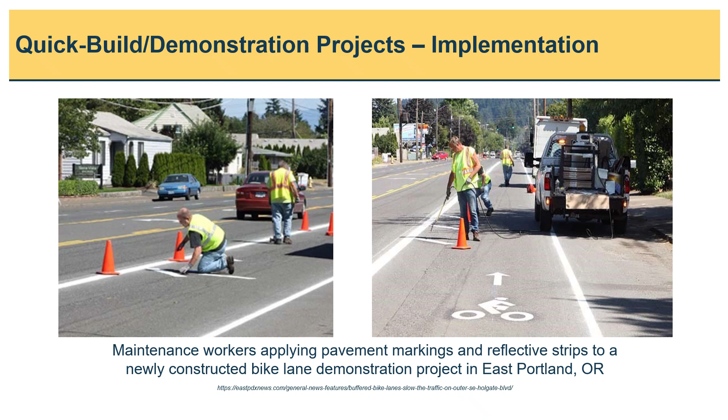Community members play a vital role by contributing labor, local knowledge, and feedback, ensuring the design reflects neighborhood needs and builds public support for long-term changes.

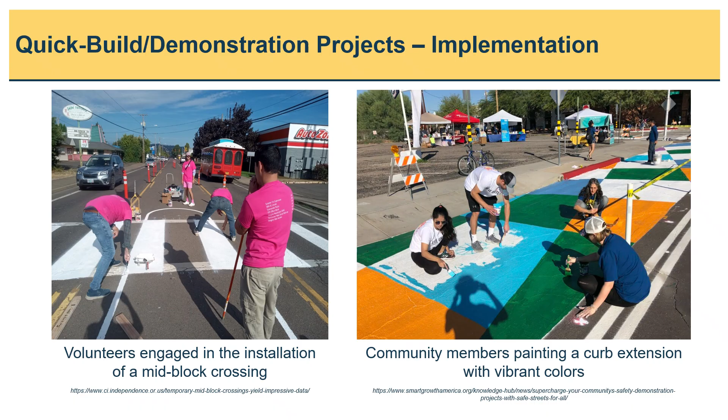Quick build and demonstration projects offer an opportunity to collaborate with safety partners around the region. Consider what other departments within your agencies may have in terms of materials, staff, or other resources to help implement or promote the projects being developed. Similarly, these projects may be an ideal circumstance to partner with other county or municipal agencies, state agencies, or other counties to share experiences and lessons learned with quick build or demonstration project implementation. Since these projects are short-term, partnerships may be less formal than traditional project development, allowing for opportunities to expand the project team and create new working relationships.

Cross-County Connection is another great organization to consult and include as a partner for quick build and demonstration projects. Cross-County Connection serves the entire SJTPO region and partners with municipalities to implement quick builds and demonstration projects.

These projects are an excellent opportunity to build a partnership with the community and local neighborhoods. This engagement will establish trust, communicate the needs of the community, and include the public on important decisions that will impact their commuting. These groups can include various community organizations and clubs, religious groups, schools, businesses and restaurants, parks and recreation, municipal departments, local artists, and local leaders.

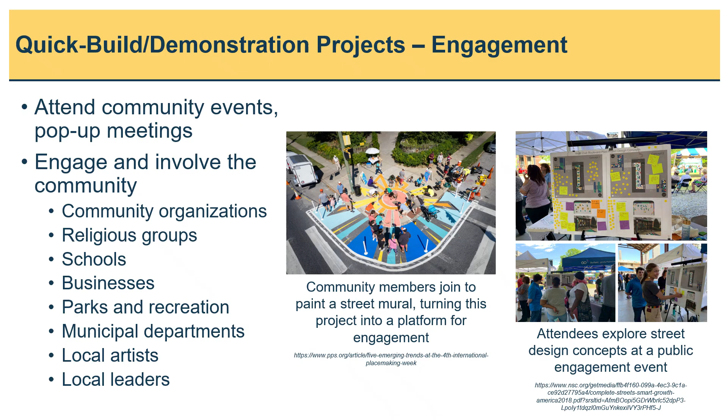Attending community events, such as farmers markets and festivals, is an opportunity to interact with a diverse group of people and receive their opinions on issues within their own neighborhoods, or to present a proposed project.

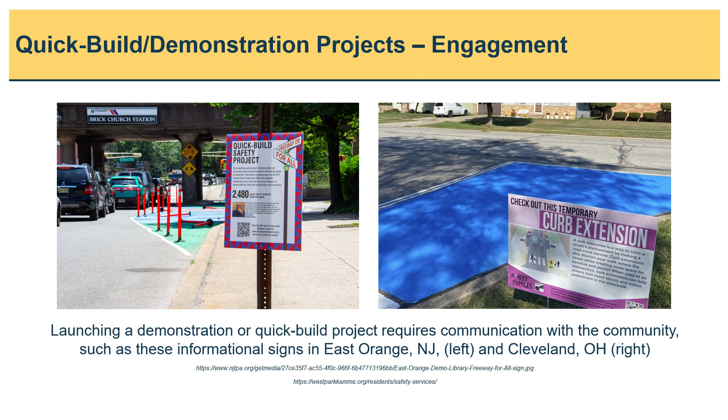Community engagement is a vital part of quick build demonstration projects, shaping both their design and long-term success. In these examples from East Orange, New Jersey, and Cleveland, Ohio, signage and outreach efforts invite residents to learn about the temporary curb extensions and pilot safety improvements. Including a QR code, website, or social media platform encourages the community to get more information about the project, a potential timeline, and to provide feedback or concerns.

Since quick build and demonstration projects are intended to be short-term temporary solutions, there should be a time frame of implementation determined when the project is designed. This can range from several weeks to years, depending on the type of project and success or failure based on performance data, which will be addressed on the next slide, and public feedback.

Public feedback can be collected in a variety of creative ways. A survey can be posted to the LRSP website at saferoadssouthjersey.com or sent out as part of an emailed newsletter. Posting for opinions on social media is another way to collect input from those who are interacting with the project. Also try attending outreach events, such as farmers markets and local functions.

The steering committee will be responsible for tracking the progress of the projects and reporting on any progress, issues, and resolutions. All updates should be published to the LRSP website at saferoadssouthjersey.com.

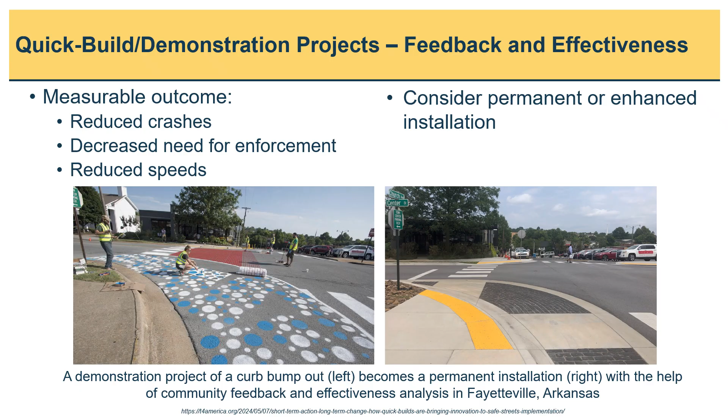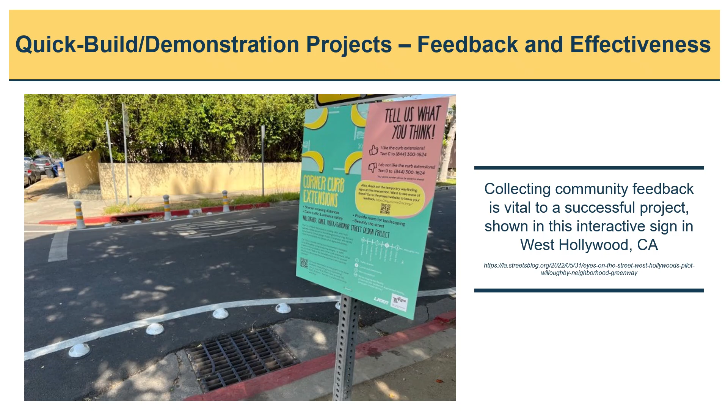The Complete Streets Technical Assistance Program offers resources, training, and assistance to municipal governments within the SJTPO region in order to implement or enhance the Complete Streets initiative, which prioritizes designing streets to accommodate all road users. This technical program was founded through a partnership with the Rutgers Allen M. Voorhees Transportation Center, Sustainable Jersey, and Cross County Connection.

The technical assistance offered includes developing a bicycle network plan to improve infrastructure, coordinating a community workshop walk audit to identify pedestrian and bicycle improvements along a roadway segment, and policy guidance for the Complete and Green Streets for All program. Another resource through the assistance program is a materials lending library.

Quick build and demonstration projects are a key component of Complete Streets, as many of these projects are aimed at improving conditions for vulnerable road users. The Complete Streets Technical Assistance Program also supports the development of several plans, some of which may include temporary demonstration projects, such as a bicycle network plan, Complete Streets Community Workshop Walk Audit, or Complete and Green Streets for All guidance.